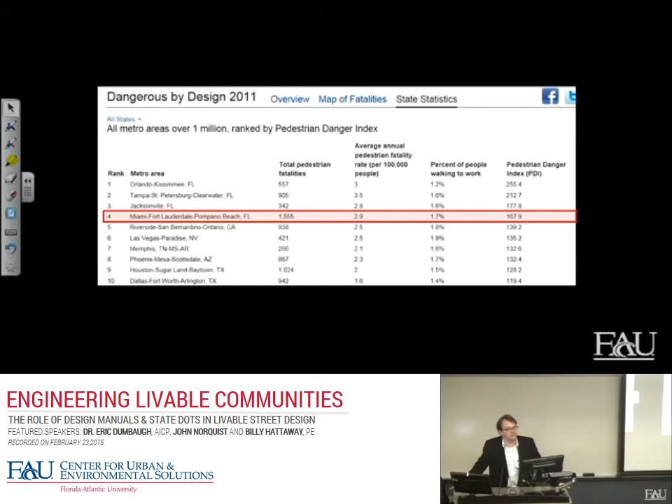So first, most of you know this, we are in Florida, there's a newer one out now, but we have some of the worst metropolitan areas for pedestrians and cyclists. The four worst areas in the country are here in Florida, with Miami-Fort Lauderdale being number 4. Though I think we might have come up to 3 in the last one, right? Yes, which was based on 2012 data. All right, number 14. Excellent. So we're getting worse. Exciting stuff.

We lead the nation in the number of senior citizens killed in traffic accidents. So not only do we kill everyone at a higher rate, but senior citizens especially, our most vulnerable people.

We also have, and I don't know Billy if you knew this, we have the most dangerous city in the United States for traffic fatalities, the city of Fort Lauderdale. If you want to get injured or killed anywhere in the United States, that's the place to be. They have 22 fatalities per 100,000 population, which, by way of comparison, is worse than Mexico. You're better off driving in Mexico than you are in Fort Lauderdale. We've got a perfect storm of tourists, drunks, unfamiliar people, the crazy yacht folks, all coming together and running into each other every day.

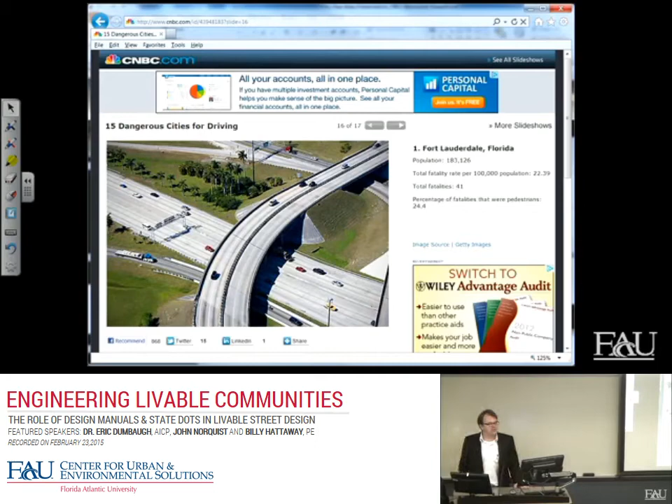And it's gotten so common down here that cities have elected to start regulating the roadside memorials for all the people that are getting injured or killed in our streets. This came out a while back, we can thank Coral Springs for it. Tired of being reminded about the deaths and injuries occurring on the roadways, they introduced land use regulations to prevent those memorial markers from being put on their roads. Because you can't maintain the fiction that you're a great place to live, work, and raise a family if your children and loved ones are getting killed on the streets. So rather than address the safety problem, we'll just go ahead and ban the signs, right? No harm, no foul if you don't see it. Out of sight, out of mind.

So how do we get this? First, let's go back to why we have the roadways we have. The issue that we have as urbanists are the issues of big roads, and how we're going to address these things.

Now, we had a very real problem with big roads at the turn of the century, but not the ones that we have today. The problem was that the majority of our roadways were dirt, right? Roadways that were prone to becoming impassable during the wet season. Those of you who have seen clay dirt roads know this. They're impassable, they become swamp during rainy seasons.

And then they're almost as bad in the summer when it's dry because all the ruts and grooves that have been put into place during the wet season then become locked into the ground. If you've ever driven or been on a clay road, you know exactly the problem here.

Now, the issue becomes when you have goods movement. You've got an agricultural society trying to get goods to market. The challenge was, how do we build a transportation system that's going to cross the country and allow people to get their goods to market with a minimum amount of delay? And there's a couple ways you could do that.

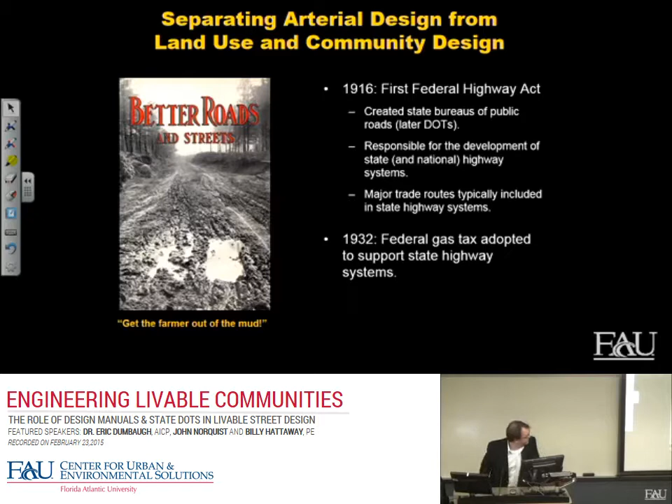And of course, everybody wants free money, right? Federal funds are free, right? They're magic money. They don't come from anywhere. You want it. So everybody adopted, that was sarcasm. Everybody adopted state highway agencies at the time.

Now we need to add a further perspective about interstates, because this, I think, is pretty important to the legacy of what's come back subsequently. Also in 1919, there was a concern about what would happen if the west coast of the United States were ever invaded. How would we get troops from Washington, D.C. to San Francisco? How long would that take?

So the U.S. Army put together a transcontinental motor convoy, which was tasked with moving a regiment of troops from Washington, D.C. to San Francisco to see how long it would take during a crisis event. Now, one of the people that was part of this, that led it, was a young, I think he was a lieutenant colonel at the time, Dwight Eisenhower. Right? He was tasked with leading this movement of troops from one side of the country to the other.

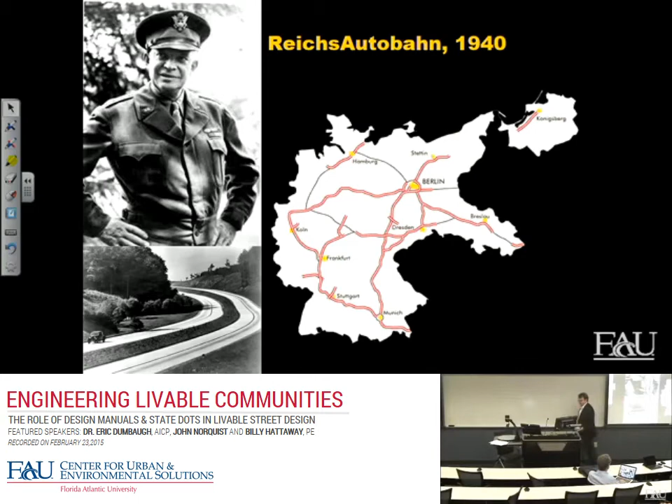Right? This was national standard by the American Association of State Highway Officials. For those of you who want to divide, how many feet is that per lane? 9 to 10, right? Can we do that today? No. Substandard, right? 9 to 10 foot lanes. That was the common. That was the basis.

This thinking changed in the 1960s, and it changed as a result of the publication of Unsafe at Any Speed. It was published by Ralph Nader, and we know it for the repeal of the Corvair, but it was actually a theoretical treatise on how we ought to be addressing safety in the United States. And what Nader was arguing is that we ought to be addressing safety on our roadways just as we do epidemiology. Epidemiology as a profession is concerned with the elimination of the environmental sources of hazard and injury. And it's based on the premise that we often can't assume that people will protect their own health and safety.

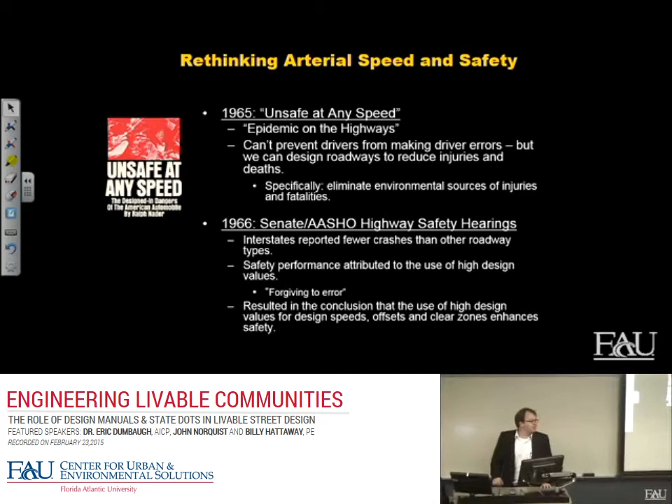Right, this carried forward some testimony at the time so you can get a sense. I'm not making this up. This is actual testimony that became the basis of U.S. design policy. Kenneth Stonex, who, if you get the Lifetime Achievement Award for Safety from the National Academy of the Sciences, it's named after this guy.

Now, what was his perspective on safety? What we ought to do is we ought to operate the 90% or more of our surface streets just as we do our freeways. We ought to convert our surface streets to freeway road and roadside conditions. Widen the lanes. Widen the clear zones. Add the shoulder. Make it as wide as you possibly can. Take the interstate standard and put it on our urban street.

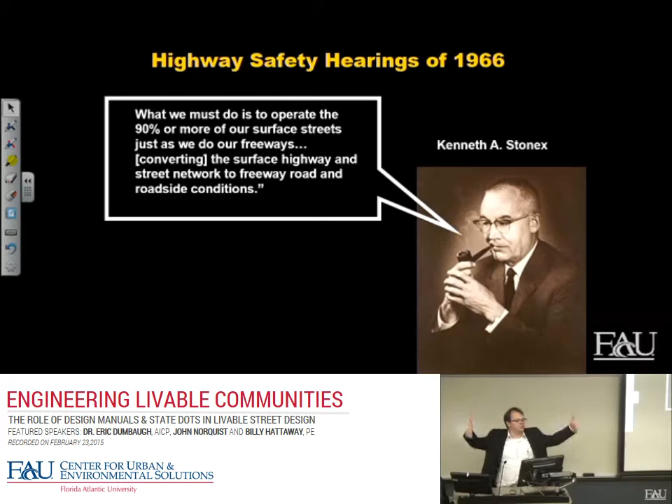The first is we ought to take the most ridiculous driving scenario we can imagine and use it as the basis for design. So when I did my PhD in engineering, I learned the concept of the design driver. Do you have any engineers in here who know that concept? What's the design driver? Now, I was trained that the person we should be designing for is a little old lady on an unfamiliar roadway at night in the rain while drunk. And if we can design it for her, it should be safe for everyone, right? This isn't a real person. It's an imaginary set of conditions.

Although if we were being serious about actual risk, it would be a teenage boy in the car with his friends at night while drunk. Those are the ones that crash. And texting. And texting, right? We can add that now. So let's not worry about real things. Let's worry about imaginary worst-case scenarios.

And then secondly, this is the best, that we don't even have to know why these crashes occur. Let's ignore the causal chain, right? If we assume this worst case scenario, we can solve the safety problem even while completely ignorant of the precipitating causes, right? And ignorance is knowledge. That's what he's saying. And this idea gets carried forward.

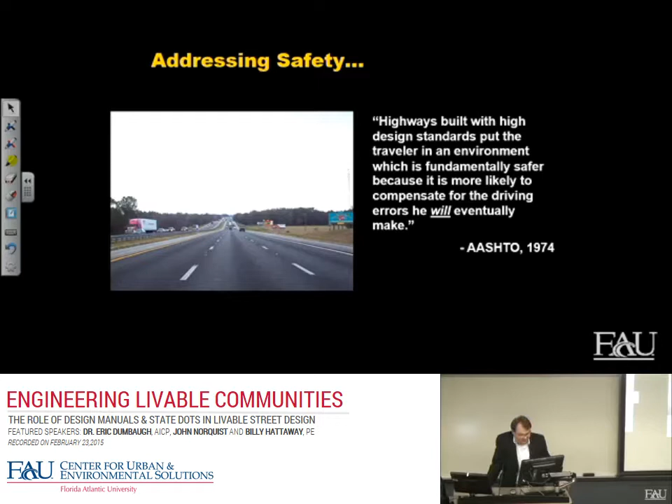That's why we can have as goal one in any transportation plan the creation of a safe and efficient transportation system without paying any attention to safety whatsoever. By virtue of making it efficient, we can assume that we have therefore made it safe. All right? This carries forward through subsequent editions. We have two more after this one, but you still see it in there. Every effort should be made to use as high design speed as practical to attain a desired degree of safety.

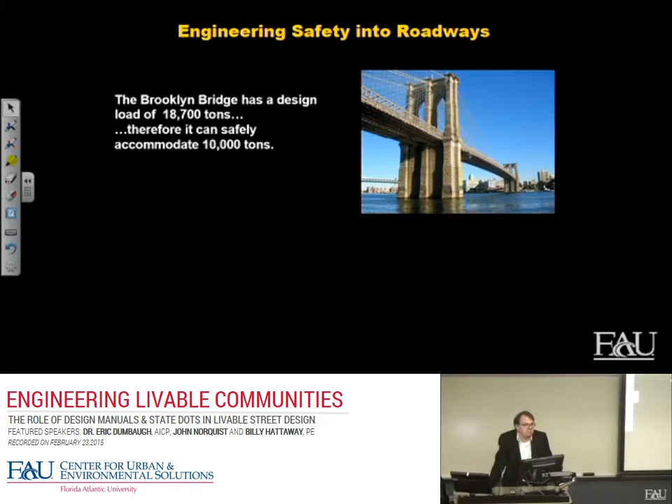Right? And from an engineering standpoint, this makes great sense. Right? This is exactly how we're trained. So if the Brooklyn Bridge has a design load of 18,700 tons, it logically follows that it can accommodate a load of 10,000 tons. Right? That's about half. That makes sense. Likewise, if we design a street to be safe for people traveling at 60 miles per hour, it should therefore also be safe for people traveling at 30. Right? Does that follow?

There's some disagreement here. All right, another thing, this will highlight the problem here in a second.

So we also have this thing called the 85th percentile speed. This is, we go out, we observe drivers, and we try to understand what should be the appropriate speed limit for a street. This is from the Texas Design Manual.

Could be anywhere, the same concept applies. What we want to do is go out and get a distribution of all the speeds we observe on a roadway. And what we find is that roughly 85 percent of people fall within a certain band, and there's a curve of drivers going significantly faster than that. We say these people are being unreasonable, we can address their safety, but most people fall in this band.

So if we pick the 85th percentile number, we should be able to design a roadway that's safe for most of its users. Now the rationale here: the majority of drivers are reasonable and prudent. They don't want to have a crash, and they desire to reach their destination in the shortest time possible. Because of those three things, the 85th percentile speed should be considered the maximum safe speed for the roadway. We'll observe how fast people feel comfortable driving, and then we'll design for that.

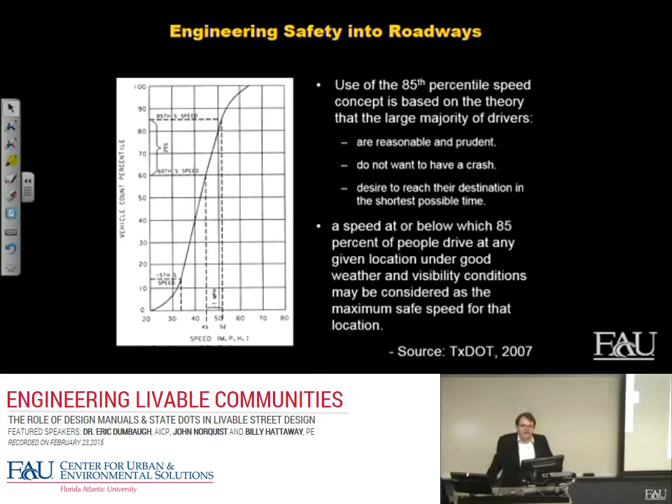All right, let's take this and apply it to another health concept. Let's apply it to obesity in the United States. Same premise here: the majority of people in the United States are reasonable and prudent. They don't want to suffer from obesity, heart disease, or diabetes, and they're going to eat the food they enjoy.

Therefore, a safe BMI is that which is equal to the 85th percentile BMI of the population as a whole. Now, the 85th percentile BMI of the population is like 33, which is morbidly obese. So what we've essentially done with this logic is wiped away the obesity epidemic in the United States. All gone. I don't ever have to go to the gym again, because most people are reasonable and prudent.

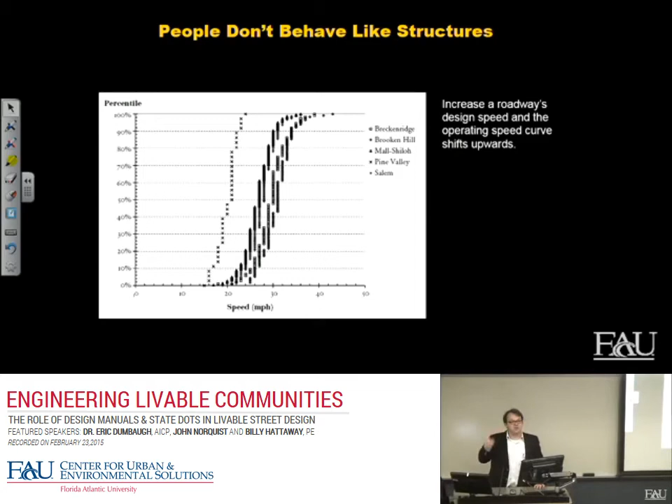We widen these things out, widen the lanes, and more importantly, widen the distance between buildings. We're not making the roadways safer or less safe necessarily. The one thing we're always doing is making people drive faster. The wider it is, this shows a straight linear function: the wider the lane width, the wider the street width, the faster people are going to go. That is an absolute truth. Widen it and they will go faster.

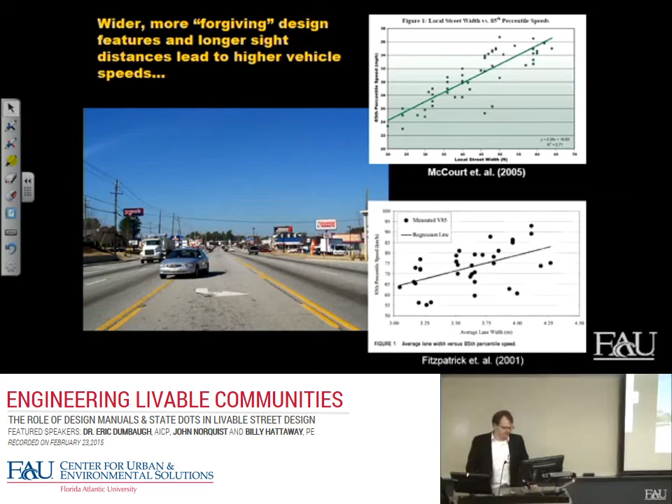Now, in some places this isn't a problem. It's not a problem on the turnpike out by Okahumpka. There's nothing out there, you're just driving, there's no impedance, it's fine. Where the problem comes is when you apply it to an urban environment, because there are all kinds of obstructions: pedestrians trying to cross the street, cars not knowing where they're going, stopping, taking time to turn. There's all kinds of things going on in the street, and the faster you are, the less likely you're able to respond appropriately.

So let's look at stopping sight distances for different speeds. This is the amount of time it takes for a vehicle to stop from when the driver first observes a hazard to when they're able to bring the vehicle to a complete stop. At 20 miles per hour, superimposed over Portland, these are 200-foot blocks for perspective, and this right-of-way is about 50 feet from building to building. At 20 miles an hour, a 100-foot stop: somebody crosses mid-block, a person entering that block can stop. Crash avoided.

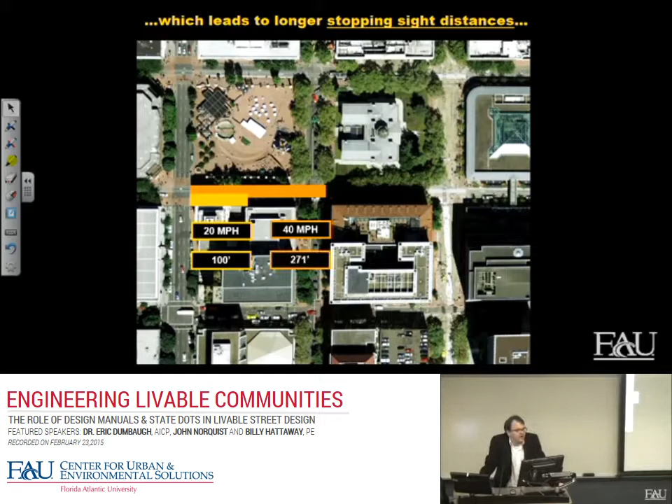Let's go up to 40 — going all the way through the first block and into the intersection. Anybody crossing in this environment is going to be struck. The car simply physically can't stop.

And if we go up to 60, we're going all the way through the first block, all the way through the first intersection, and then all the way into the second block as well. Right? That's the safety problem, right? When there are all these conflicts here in which vehicles can hit.

And we widen things out, we make them go faster, we make people less likely to be able to avoid those things. And the problem can be kids darting out into the roadway. Kids do this, right? We can blame the pedestrian and say they shouldn't have done it.

And maybe they shouldn't have, but they're going to do it, right? And pretending boys, right, pretending that a 13-year-old boy isn't going to do that, you can wish in one hand and do what in the other, right? Like, that's just what kids do, right? The same thing with drivers. You can put that no left turn, no crossing sign here. People are going to do that, right? These things are just part of the urban environment. People need to get from one side of the road to the other.

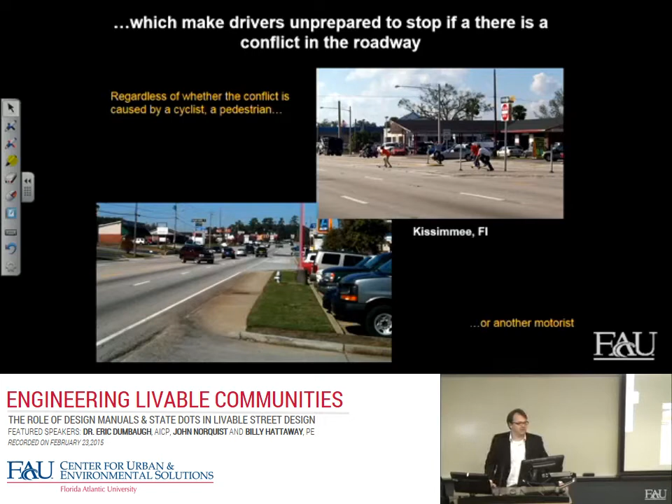And we've created a condition where they're going to get struck when they do it. We've gotten the gun, we've loaded the chamber, and then we've handed it to people. And it's them behaving as they would naturally behave that constitutes the pulling of the trigger. Everything is set up. It just takes somebody to precipitate that chain of events to cause the injury or death to happen. All right? Now, sometimes we like to play this shenanigan.

What's going on here? This is Hampton, Georgia. Anybody, what's wrong with this picture? No. Speed doesn't match the design section. Not at all. Not at all. Who is this good for?

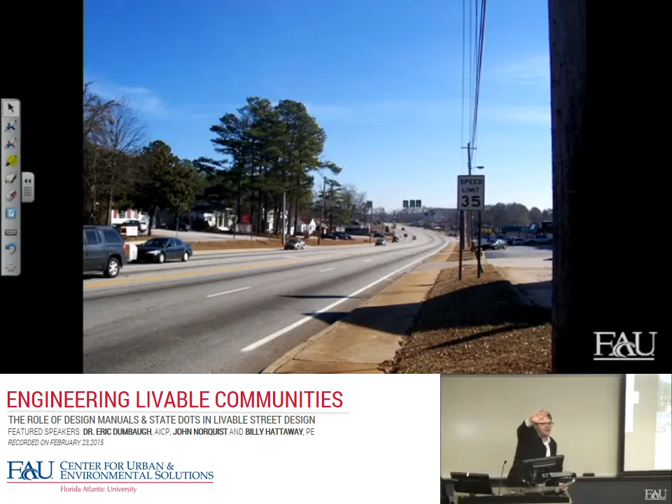Police. Police love it, right? If you want to make money, generate revenue for your locality, you set up a cop with a radar gun right there. The road says go 60 miles an hour. Tear it up. We'll even put a little curvature in that roadway for you too, right? So you can bank it like at NASCAR, right? Just tear it up. And then we'll cite you and you'll learn your lesson.

All right? I'm going to skip some of the stats, except to say this.

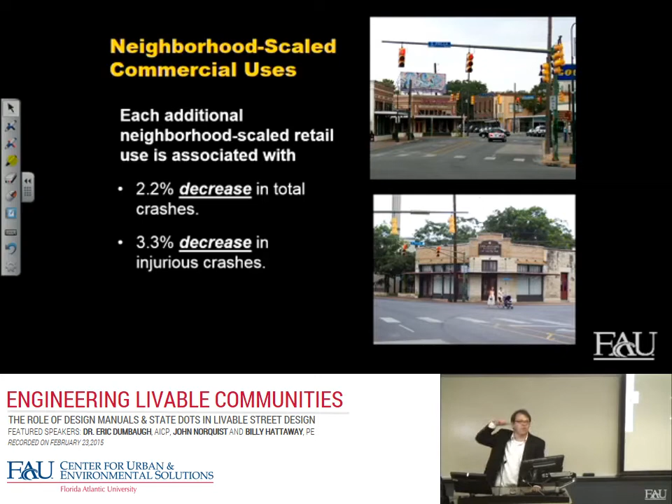In urban environments, when we start bringing these things back up to the street, what we see is that things are actually safer. I mean, right now our land use policy tries to push everything as far back from the roadway as possible. But when we start bringing these things back in, we see statistically significant reductions in crashes, not just for pedestrians and cyclists, but for everyone. Motorists, pedestrians, and cyclists alike.

In Livable Streets, part of my dissertation work looked at the safety benefits of these things compared to conventional arterial design. Significantly fewer crashes, right? Overall, we looked at mid-blocks, 40% fewer mid-block crashes, and 100% fewer fatalities. The fatalities didn't happen. I couldn't even model statistically fatal crashes for the livable section because I didn't have any observations, right? It's a crappy problem for a researcher, but it's a wonderful problem for safety.

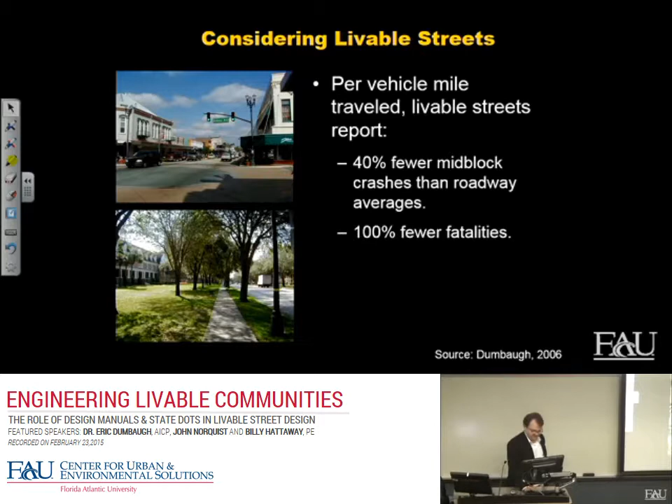Right? Wouldn't it be great if I didn't have to worry about this anymore? No, actually, I'd be out of work. So go out and get killed so I can record that, right?

Right? And an interesting thing happens when you slow things down even more. Right? Where, as a species, we're encoded to pay attention to the interactions of other people. We're designed to function pretty well up to about 10 or 15 miles an hour. We tend to survive impacts pretty well at that level. You guys have probably all seen this, the graphic that shows you the rate of speed versus your likelihood of survival. 20 miles per hour or less, your likelihood of surviving is pretty good.

Another interesting thing is true, too, that we, the naked ape, as Desmond Morris calls us, we pay attention to visual features on other people. But we can only do that up to about 10 miles an hour. When we're moving faster than that, we can no longer perceive the visual cues that we're getting from other people, so we stop interacting with them like people. Right? We start going into the car sphere, and you guys know this too.

In fact, a friend of mine related this problem the other day. She was taking her son back from karate practice.

They're driving, and there's an idiot in front of her that just won't pull out of the stop sign, and she's getting frustrated. She hits her horn a few times. Her son is like, 'Oh my God, don't you know that's Kasim's mom?' And she felt horrible, right? Because she was dealing with the impersonalized abstraction of an automobile, not realizing it was actually part of her social network that was in there. So suddenly the entire norms changed. She thought, I shouldn't have done that.

The same is true when you're in a car generally. It's the idiot in the Impala, it's the idiot in the Charger, it's not a human being. But at 10 miles per hour or less, you start to see the visual features of these people. You can see what their faces are communicating, and you slow down.

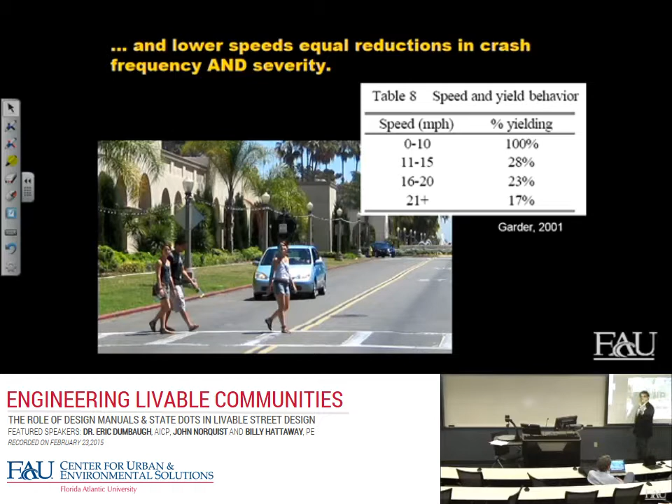This is one of those things you do when you're a teenager. One of the experiments I did was seeing which buggies people were least likely to affect. You have the two carts: the regular shopping cart and the baby cart. So, again, you're a teenager, you're bored, so we would push the carts right in front of people's cars to see how they would respond. The shopping carts, they would actually just back out and push it away, but the baby carts were sacred, even though there were no babies in them. The idea that a baby might be associated with it made it a little extra special. Nobody likes dead kids.

Hopefully. I'll skip all this. I don't think we need much of this. Yeah, that's what I want to say.

What I want to do is talk about that to segue into these presentations with that context, which is: we've tried to superimpose the highway environment on the urban environment, and this has created a whole host of problems. It's totally negatively impacted the value of a lot of our cities, which John has become expert in, and it's created a lot of fuel for folks like Billy to solve all the problems we've created. We're going to put the pressure on him to do that.

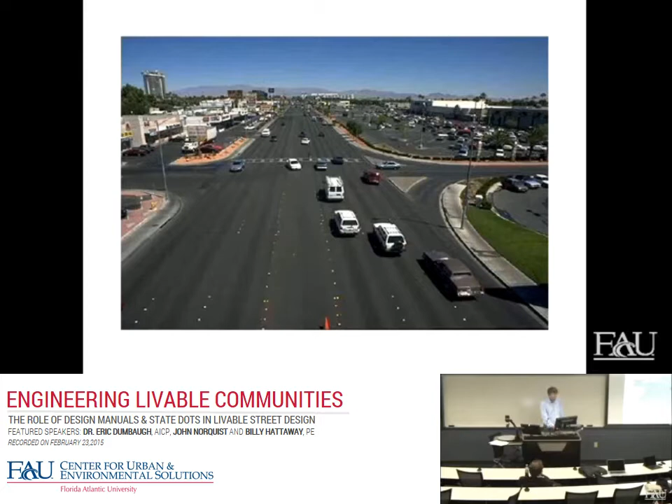But it's dangerous to cross streets. You all know that if you try to cross Glades or many of the other streets in Boca Raton. And the biggest streets tend not to have much going on, particularly in terms of pedestrian activity.

But this desire to have the streets move traffic quickly, you have to understand, when the new technology of the automobile came along, it must have been a tremendous thrill to all of a sudden be able to drive fast. And so the idea of a grade separation in a city must have been very attractive. Not having to slow down, not having to go through frustrating traffic, but just be able to whip right through the city.

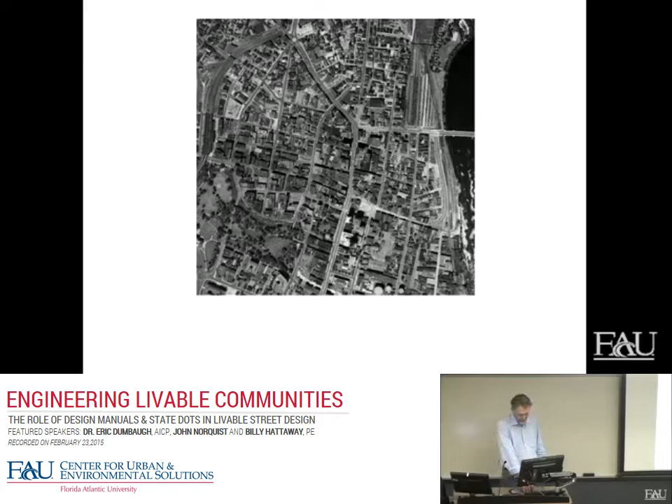And so the idea of re-engineering the cities to accommodate this traffic relief led to the re-engineering of cities. This is Hartford, Connecticut, an aerial shot right after World War II. And this is the way it looked 40 years later. You can see where the freeways have gone. I'll put it back so you can see the previous shot again.

An even more striking example is St. Louis, which was in the 1950 census the eighth largest city in America. It had 900,000 people. Today it has 327,000 people, almost two-thirds less.

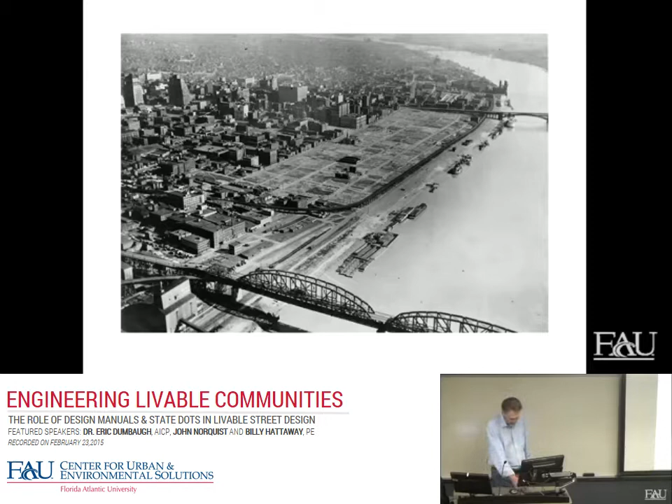Today, with the resurgence of attraction to urban life, it would be a very, very valuable place. Here's a view of how it looked with the Eads Bridge in the background.

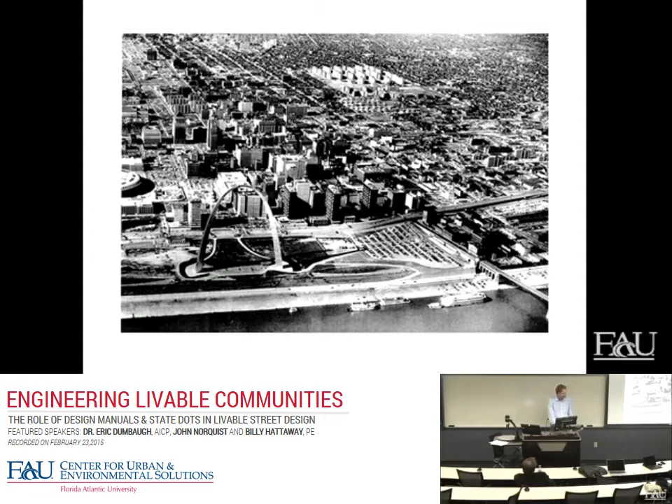And here it is with the arch, which was placed in there. I've been in the arch. It's a tourist attraction, but it pays no taxes, and there's no census tract of population. So one of the reasons St. Louis declined was that. Another is that they built freeways to the point where the Famous-Barr department store is closed, so there's no department stores in downtown St. Louis, even though it was the 11th largest city in America at the end of World War II.

Now it's not just big cities that are affected by this desire to defeat traffic congestion, to fight traffic congestion, the war on traffic congestion, sort of like the war on drugs. The war on traffic congestion led to casualties, and the casualties, of course, were the cities where the remedies were applied.

Now, we usually blame it on Billy or Eric or anybody who's an engineer. It's their fault, but it's really not the engineer's fault. Every beautiful place that you love, if you like South Beach or Greenwich Village in New York, or the old neighborhood in Boca Raton, anything you like, you have to realize engineers were involved in designing those things. So the commissioner's grid in New York City, engineers did that. So it's not about that, but it's about a lot of things. But one of them was the design sensibility of the modernists.

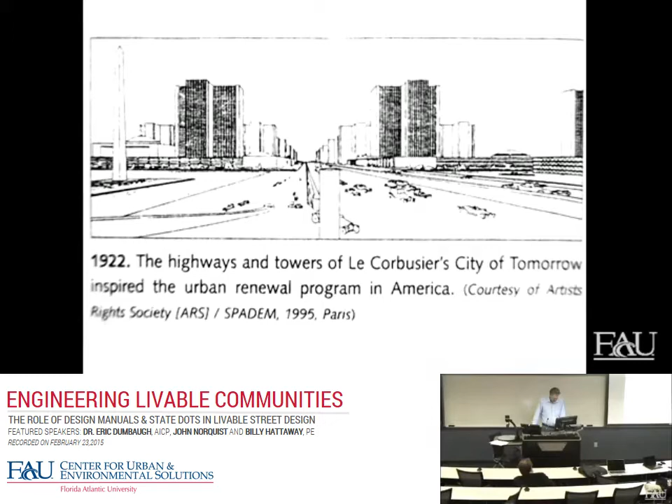And so one of the things that was new was the motor car and the idea that you could drive through a community without having to stop, that you could just whiz right through. This is Corbusier's drawing in 1922, with the steel reinforced buildings. And this is a drawing of what he wanted to do on the right bank of the Seine and the Jewish quarter: replace all those buildings with his design, with just tall buildings and all streets grade separated. Now that wasn't done in Paris. They resisted it, so it never happened. If you go back to Paris, the Jewish quarter is still there, and it's worth billions of dollars, billions of euros in real estate value.

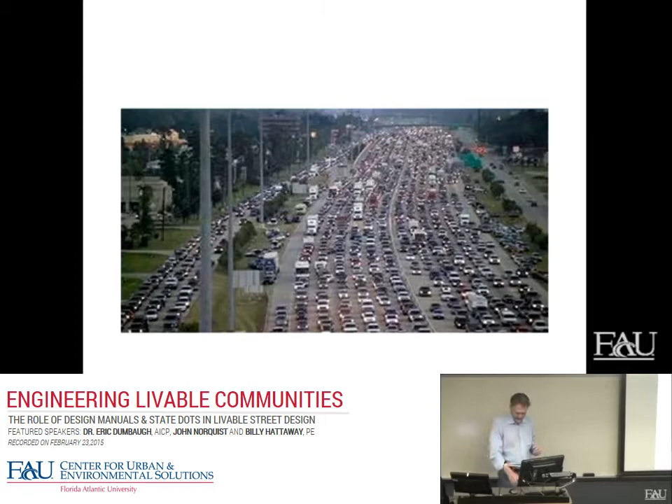And this is one of the bigger freeways in Houston. This is an unusual picture because they're all going the same direction because they're evacuating Rita. And one of the purposes of the freeway, the National Defense Highway, was an evacuation route from the cities. So that if the Soviet Union would launch and the missiles would come from Kamchatka and Siberia over the Arctic Circle and land on major cities like Houston, in the 41 minutes or whatever that you had from the warning, you would be able to hop in your vehicle, get on the freeway and head out, and then look back and see the mushroom cloud, but you wouldn't be dead.

But that's not how it worked, because you could see it with Rita. When Hurricane Rita was coming, the freeways were inundated. A lot of the street grid that Houston ever had had been eliminated, and so people weren't able to get out of town very fast. Anyway, I don't want to focus just on freeways.

The other streets all have characteristics that fit on a gradient, from the alley to the large expressway. And these issues have been visited on all of them, to the point where, for the standard arterial street in the U.S., if you wanted to do the right thing, you'd follow AASHTO. It's not really a guide. It's a guideline. They say there's flexibility. You don't really need to do it. But if you want to do it right, you do a 70-foot arterial with a 20-foot double left turn lane, and then a big clear zone on each side. What do you think, 100 feet, 30 feet? At least 30, 100 if you can get it. And that way it would be safe.

And then you end up with pedestrians, there's no money left for sidewalks, so they gradually form a dirt path, or you can walk in the gutter. But on the big ones, on the expressways, you wouldn't even be able to do that. All right, so we came along with this Designing Walkable Urban Thoroughfares. Billy helped with that, along with many other traffic planners and engineers and professionals. And the basic idea was to create an alternative for urban context.

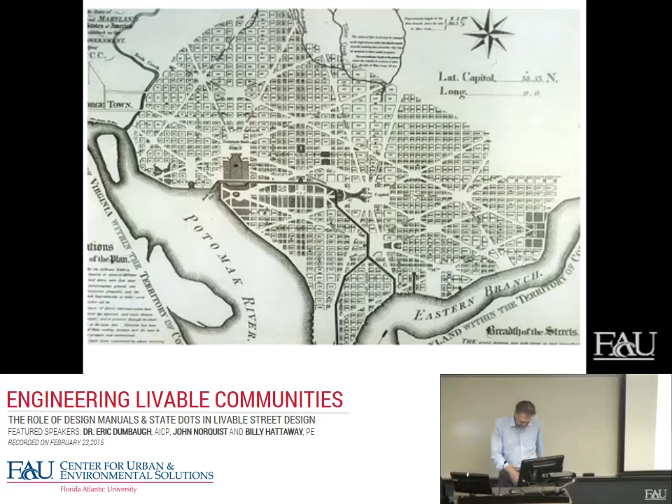The traffic engineers tried to have time-of-day no parking, and the merchants wouldn't have it. And the merchants have a lot of power. Because of the corrupt Chicago political machine, the property owners and the retail people merely have to show up at the alderman's fundraiser to block any crazy ideas. So it isn't because of some idealistic environmentalist or reform traffic person. It's because the merchants didn't want it, and the merchants have more clout, and so they won.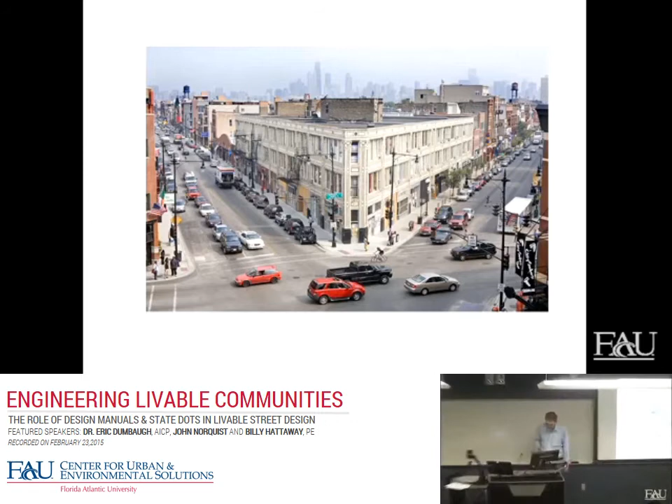And so did the neighborhood, because it is congested, but it's congested with people with money in their pockets. It's congested with all kinds of jobs. It's one of the most prosperous neighborhoods in the Midwest. And the same with Dundas Street in Toronto, which has one moving lane in each direction, which includes the streetcar. It runs right through Chinatown slowly, but it's crowded. People still get on the streetcar even though it moves slowly. They like being there. So that's one of the things about congestion.

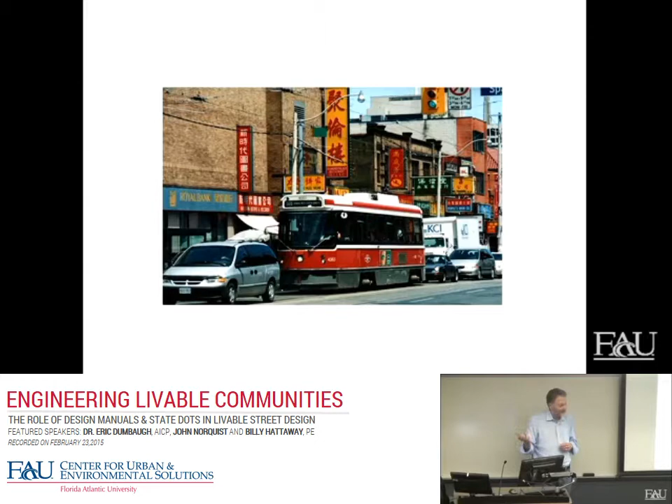When you see congestion in a very urban setting, it's usually because people want to be there. If they didn't want to be there, it wouldn't be congested. Or as Yogi Berra put it, he argued the other way. He said, people don't go to New York City anymore, it's too crowded. So, it's kind of counterintuitive.

So, when I was mayor, I didn't give much of a damn about the suburbs one way or the other. I'd pretend to get along with them. I'd go to the council mayor's meeting or something and meet with the mayor of Brookfield and say, Merry Christmas or whatever. But when I became head of CNU, all of a sudden my jurisdiction wasn't just the city. I had to think of the suburbs.

And so Elgin, Illinois, just outside of Chicago, is an old city. It was a place where they manufactured artillery for the Union Army during the Civil War. And they had a lot of steel and foundries and things. Anyway, it's a big city. They annexed a lot of land, which was still mostly farmland.

And the DOT wanted to turn Highway 20, which is this street, into a freeway, grade separated. And they said, well, that'll divide one part of the town from another, and we won't be able to develop it, and we'd like to have business. Here's a business here. They wanted to cut all this stuff off. And so the mayor asked us to help them.

Highway 20, by the way, in Chicago turns into Lake Street. So if you've ever been to the Loop, that's the street on the north side of the Loop with the L going over the top of it. It's not even 50 feet wide. In Chicago, you talk about a lot of congestion. I mean, there it is, 50 feet wide. And they wanted to turn this into a freeway in little old Elgin.

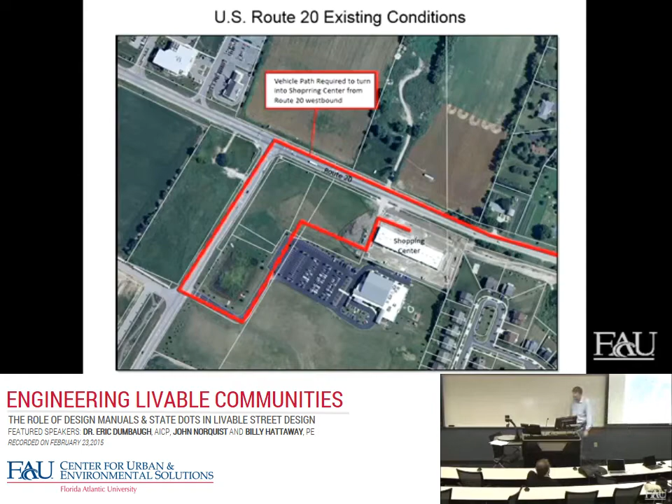So we said, well, right now, to get to the shopping center, you have to go way over here and come back here. So why don't we improve it? Why don't we make it better for the merchants and still allow you to have fast traffic and put in streets that would cross, not all of them.

And anyway, what we proposed, and I guess I don't have that slide here, I have it later in a different context, was to have slip lanes on each side and then have crossings every 3 blocks or so, and then you could access the retail and still have 4 fast lanes in the middle. And that's still being debated, and the DOT doesn't have enough money to build the freeway, so maybe we'll end up winning on that one.

So anyway, the DOTs are changing, and this is what Billy in his job had to deal with when he was first being trained. But the local roads are not important to DOTs, it's the freeway and the arterial, and that's sort of the logic to it because they're big, the state. So if you take a state like Texas, why worry about Austin's street grid? That's their problem. What they worry about is big stuff, like going from Dallas to Houston, or El Paso to Beaumont.

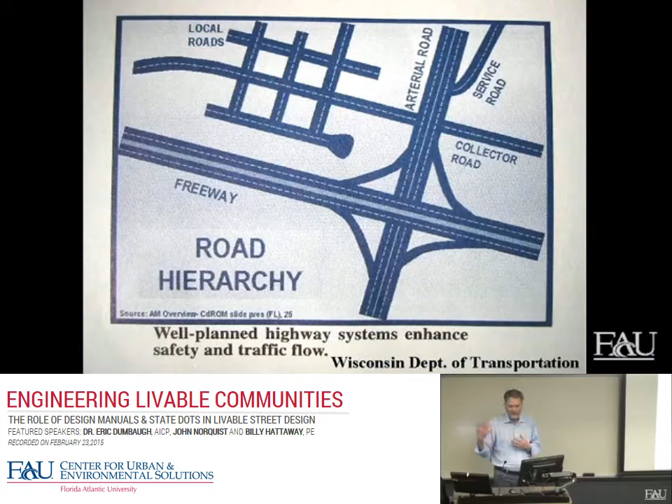So it's natural they think that way, but if you think of it in terms of a city, what adds the most value to the city? And what helps that city distribute its traffic? And so, this has been a struggle, and it's where you look at it from. If you're a local official, you're looking at it differently than if you're a state official. And that's a big part of the problem.

So, what is a city? If you look at Leon Krier's drawing about separation of uses, highly use-separated zoning, you'd have the civic center by itself, the city hall, the parking lot, the fire department, whatever, all of it named center. Anything named center is usually ugly, if you look at modern context. And then the private property separated. But if you put them all together, you get a city. And that's the way to start thinking about cities.

And if we can get DOTs to understand that once they're in this complexity, their job is to try to help add value to the civitas. And you can definitely see it with the street grid. I showed this slide once to some road builders. Look at all the roads. Look at all the road contracts with a street grid. The commissioners' plan from 1811.

Let's talk about making money off roads. We're not trying to cost them their living. We're just saying you don't have to have everything on one road.

Look at the real estate value in New York. They're tearing freeways down, starting with the one on the west side many years ago, and look at the real estate values, and look at what people are doing.

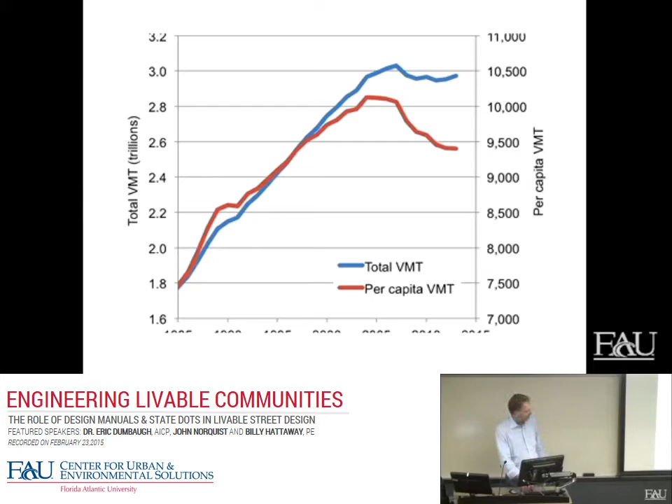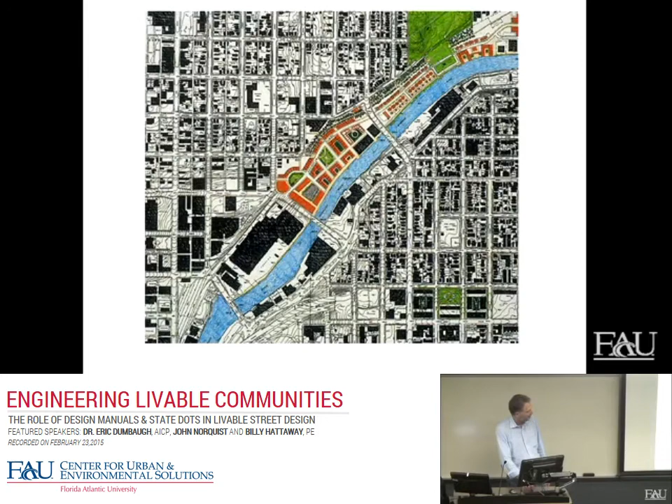All right, so I wanted to finally, toward the end here, make the analogy to water. The water engineers have already made the transition — they understand that draining wetlands is not usually a very good idea.

After years of thinking their job was to get rid of the wastelands they thought were swamps, they've learned not to destroy these places — they slow down water congestion, absorb water, and serve as habitat for valuable plants and animals.

Real estate developers like developing on the outer edge, beyond where the water is, because it works as real estate as well. The mosquitoes are eaten by bats and birds and so forth. So even that has worked.

So this kind of stuff isn't done anymore too often. There may still be a few being done in Florida someplace, but only out of complete avarice and ignorance.

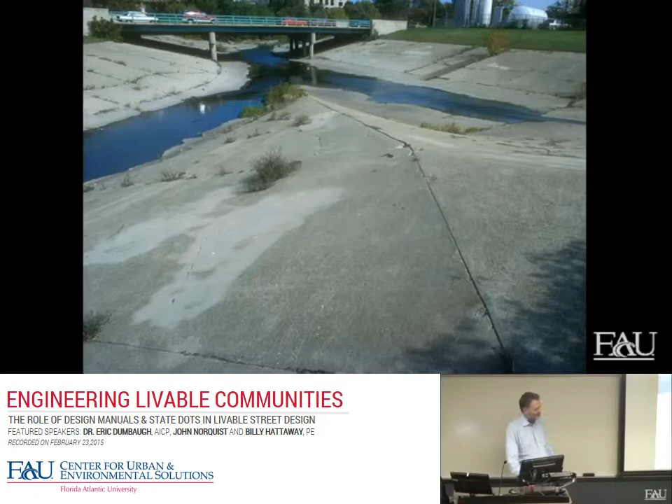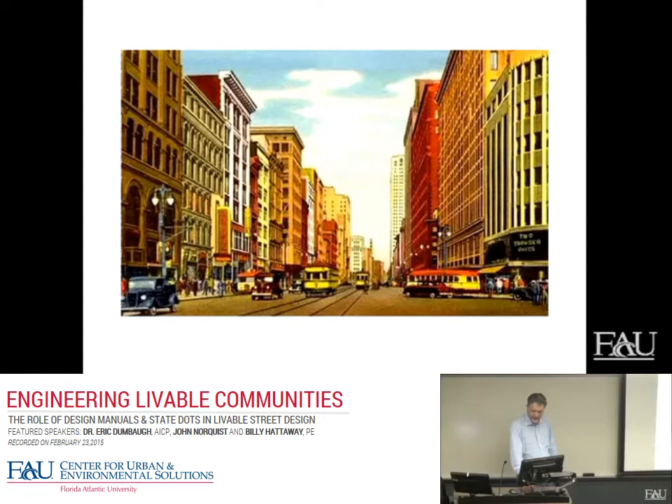Or Detroit, the most supreme example of destruction of a city — the most successful city in World War II, where more war material was produced for the Russians, for ourselves, and for the British than any other city on earth. At the end of the war, it was so successful it was congested, so they decided to do something about it — they started building expressways.

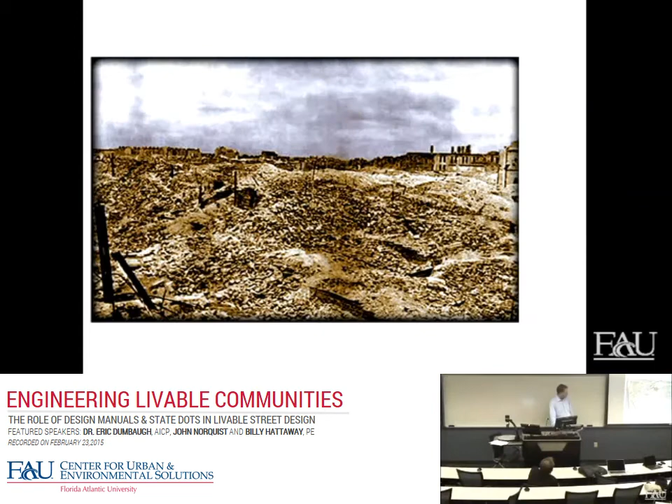This is Warsaw in 1945. Here's Warsaw today — this was actually fixed in 1953, the Old Town.

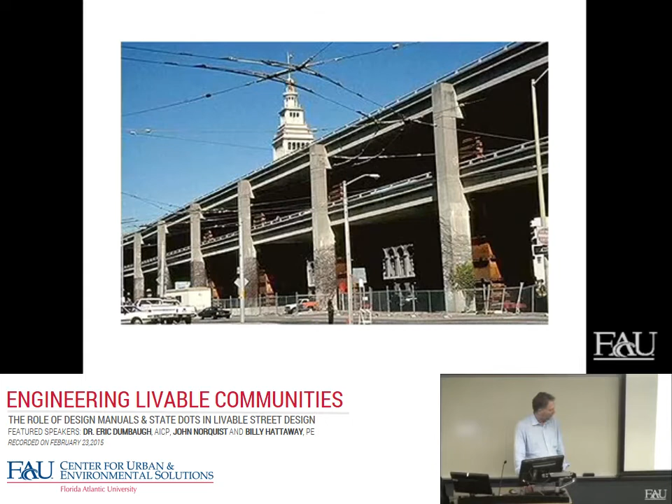This is a ground level picture. In San Francisco, one of the most beautiful cities on earth, they built a double-deck freeway. It's now gone, and the property values have skyrocketed.

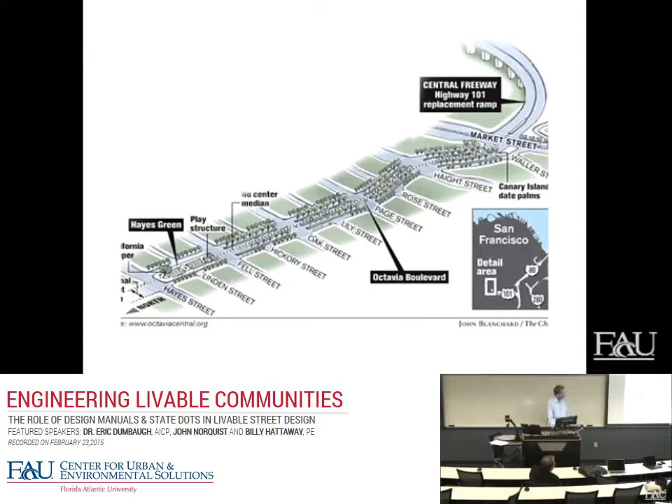They even put in some affordable housing, which in San Francisco would be more expensive than housing in a lot of other places. It's all relative. They also tore down the Central Freeway, part of the freeway, and put in a boulevard instead, and it works just fine. There's the cross section for it.

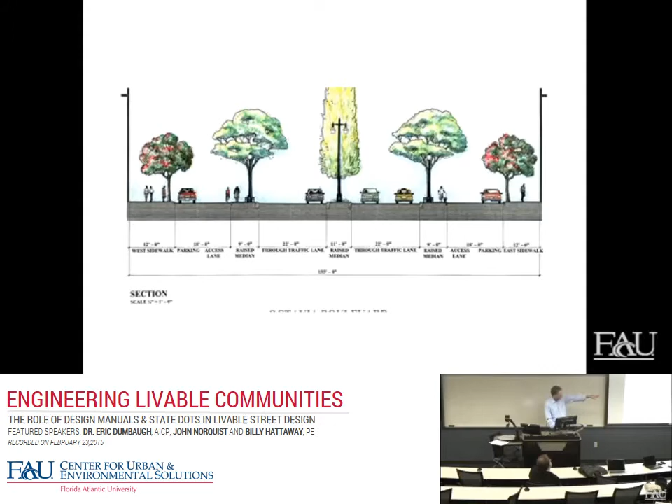And then the most dramatic of it all is in Seoul, South Korea, a freeway that went over the Cheonggyecheon River, a double-deck freeway paid for in part by American taxpayers after the Korean War. It was ripped out and the river restored. Now it's the second biggest tourist attraction in South Korea. In fact, it's the second biggest tourist attraction in all of Korea, because there are no tourist attractions in North Korea, or at least no tourists.

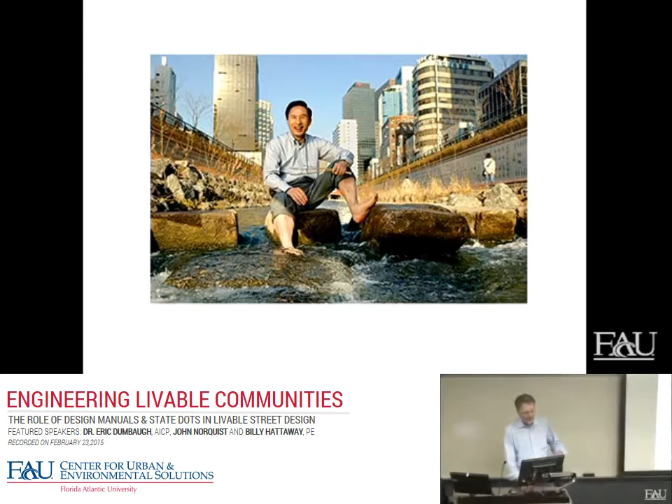This is the guy who did it, Mayor Lee Myung-bak. In 2001 he was elected. By 2003 he had removed the freeway, and look how happy he is. They've now torn down 15 more sections of grade separation in Seoul. They're going to eventually eliminate all of it, and they've added more transit, and the city just gets stronger all the time.

Now, just so you know, you don't need to be some kind of weird socialist country somewhere else in the world to do this stuff. In Salt Lake City, they have the fastest growing rail system in the country, with light rail and a commuter train that has 28 round trips a day between Ogden and Provo, stopping in Salt Lake.

It's not all about engineering of roads. You've got parking regulations. This building site was empty for 30 years because of a parking regulation requiring 7 off-street parking spots on a 19-foot frontage building. We eliminated the parking regulation, and right away the building was rebuilt.

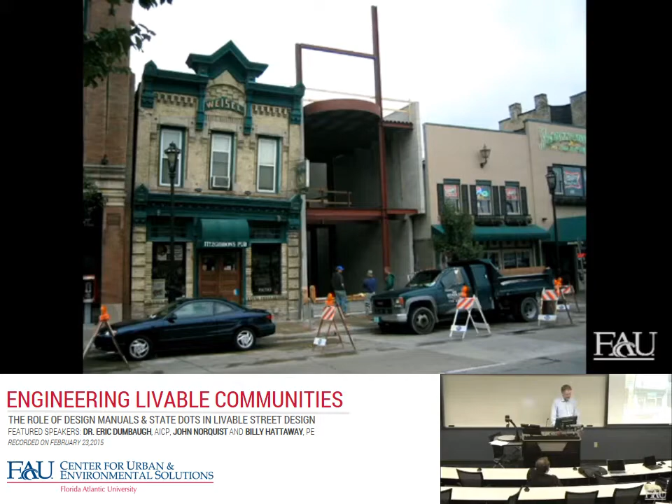Then you get these mega parking lots all over the country, like bowling alleys, with a zoning ordinance spread nationwide requiring 5 spots per lane for bowling alleys. Some planner thought that was appropriate, but there are only 4 bowlers per bowling lane. So this spread everywhere and led to non-performing real estate. The bowling centers built everywhere failed as real estate because they didn't need that much parking, and they really needed to be located with other businesses.

Good evening, there's something strange happening here. There's a whole lot of people on this side and nobody over there. Did one of you guys make the rest of these folks upset or something?

No, it's great to be here, and it's certainly great to be here with John and Eric. We go back a little ways. I'll give you the short version of my career. This, as I described to my employees, is my third and final tour with Florida DOT.

During my second tour, which went from 1987 to 2002, I ended up coming from Texas through DeLand, Florida, which is where the 5th District is based—we have 7 geographic districts. The 5th District includes Orlando, Daytona Beach, and the Space Coast. I went through that district to become the state roadway design engineer. I was recruited by our chief engineer to take that position in '95. Shortly after, a friend of mine who was the first state bicycle pedestrian coordinator in the country with a DOT was Dan Burden, and Dan and I got to be good friends.

Within a year of me coming, the state roadway design engineer took me out west, where we did a tour starting at like 6 in the morning and finishing up at 10 or 11 o'clock at night, from Portland down to Long Beach, California and back, meeting with planners and engineers from all these communities that were doing a lot of stuff right.

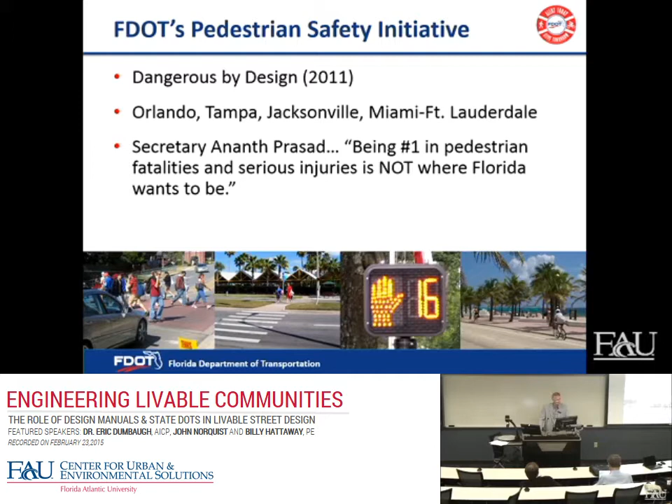And so we set about changing that direction. This is the statistics related just to pedestrians. You can see that it has a pretty devastating effect, because obviously we all know each of these people are connected to someone. They're a family member, they're a friend.

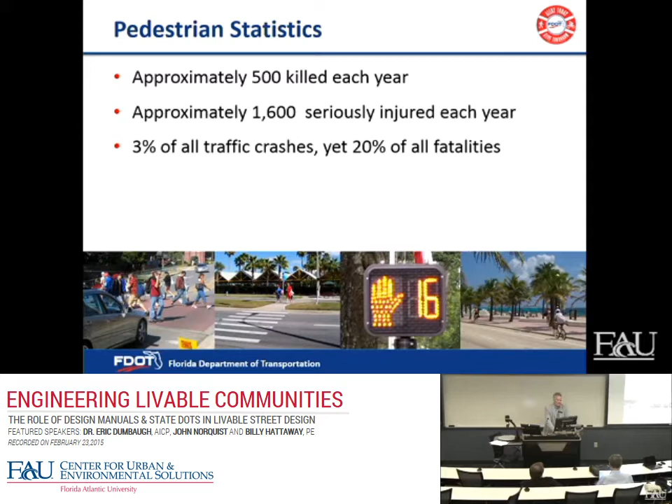And yet we have consistently about 500 people dying a year on our roads. When we first started the campaign, the secretary said, we're not going to stop with these 4 regions that are the most dangerous. We're going to focus on our top 10.

But as we've worked over the past couple of years, we decided that the difference in data from the top 10 and the top 15 wasn't different. So we've now added 5 more counties. So almost 20% of our counties are part of our focused initiative.

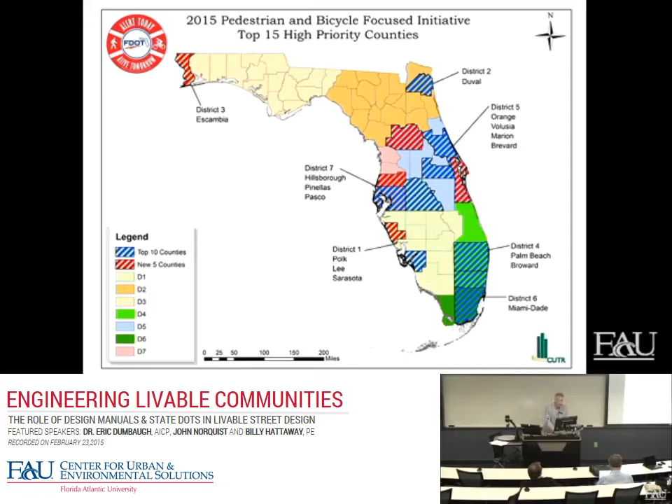It doesn't mean that we're not doing things in other counties, but our focused initiative is initially on these counties because we've got a very concentrated effort moving forward as a result of that.

So the things that we have put in place as a result of my leadership and having the secretary completely behind me: we're developing our first bike and pedestrian element for our state long-range transportation plan, which we're in the process of developing. That will lead us to a statewide bike and pedestrian plan, which we do not have today, to identify where there are gaps in our system, both for bikes and for peds, and to get those things fixed.

We adopted our first complete streets policy in September—the first one we've ever had. And Smart Growth America, the very group that publishes the Dangerous by Design report, is free of charge working with us to implement our complete streets policy throughout all of our documents as an agency.

In fact, we had our kickoff meeting a week ago today, and we'll be working on our implementation plan with them through face-to-face meetings through June. We expect to have a draft work plan from them that basically says these are the things you need to fix from a policy and planning standpoint, and this is the education you need to do. We're involving others in this outside the organization, including CNU.

So I would expect, within 2 years, our complete streets policy completely deployed throughout the organization. That's my goal, at least.

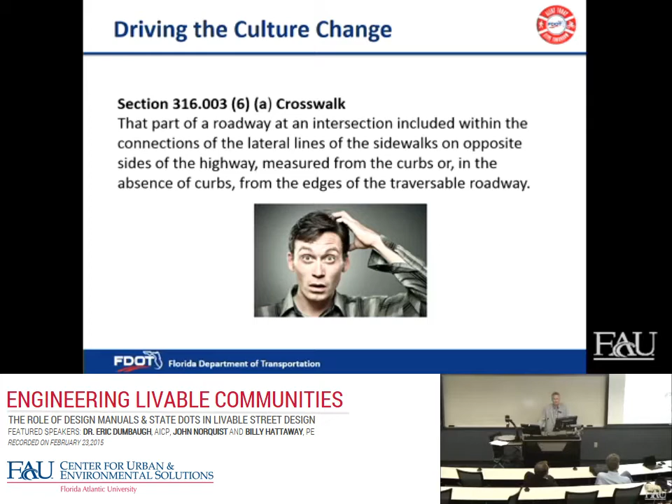So this year and next year, we're in the process of rewriting the laws. We have a group of coalition members, which I'll talk about again, but basically it's made up of our agency and a whole bunch of other stakeholders, including Highway Safety and Motor Vehicles, the Florida Association of Police Chiefs, the Florida Association of Sheriffs, and a traffic judge who's worked with us on our motorcycle safety campaign, and he's helping us with this as well.

So we're vetting these definitions with law enforcement and with the judge to make sure that what we propose can be enforced and makes sense. But obviously it will help us to educate the public.

One of the things that surprisingly came up as I was talking with our leadership about the laws: one of our district secretaries, who spent his whole career in the department, didn't realize that a legal crosswalk can be unmarked. In other words, at an intersection between two streets, or a T intersection, by law a pedestrian can cross there whether it's marked or not, and he didn't realize that. So I suspect a lot of people in law enforcement and the press say pedestrians are jaywalking when in fact they probably aren't, which is a whole other issue. Consequently, we probably have a lot of flawed data.

So how are we supporting that culture change? We're doing training and all of these things you see in the first four bullets. This training has been provided to us by Federal Highway, again for free, because we're one of the focus states for pedestrian and bike safety. We'll also have training in implementing our Complete Streets policy once we get that implementation plan.

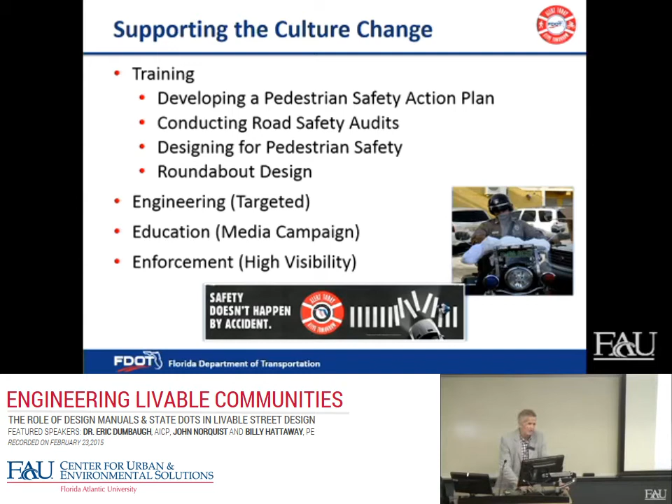But also what we know is we can't get there with just engineering. We've got to do education and enforcement. So we hand out information to drivers, pedestrians and bicyclists, helping them understand what things need to be done. We're using law enforcement first to hand out warnings when people are misbehaving. And if we don't see compliance rates go up, whether it's yielding for pedestrians or speeding, then law enforcement will ticket. Our agency is funding all of this law enforcement, because law enforcement in our cities and counties doesn't have adequate resources to do traffic enforcement.

And so we've got to do things differently. The challenge we've had after World War II was this change in land development patterns, which John highlighted previously, where we separated land use. As I put it, especially in my district in Southwest Florida, we've cul-de-saced all the development onto the arterial system, because that way developers don't have to pay for road improvements, up until recently, because the capacity is already there. And they know that if it gets overcrowded, the DOT will come in and fund the widening of the roadway.

So, for example, in Lee County, where I have a really good, probably one of the best bike-ped activist groups in Florida called Bike Walk Lee, as we worked on building our relationship I said, you guys, there's nothing you're saying that I don't agree with, but we can't fix this problem when 90% of your land development patterns are gated subdivisions onto the state road system, which is what they have. So we've got to work on the local governments, the elected politicians and developers, and that sort of thing.

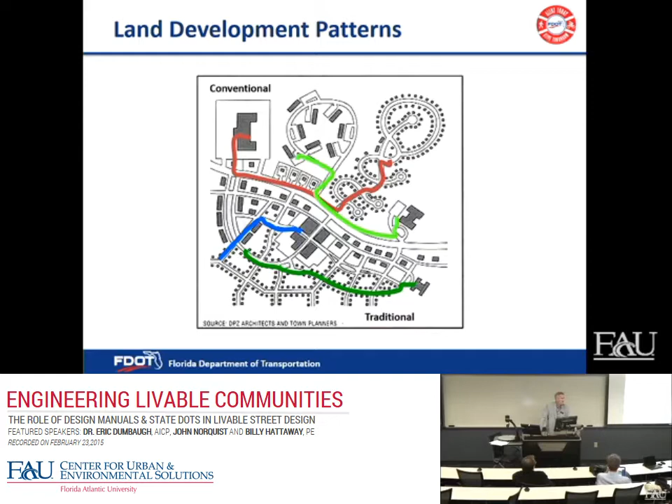People may still choose to drive, but they have lots of choices in terms of how they want to get around. And so, when we talk about complete streets, lots of folks say, well, if you'll just put in bike lanes and sidewalks and landscaping, then we'll have a complete street.

But the fact is, here's a street that has nice windy sidewalks that some landscape architect designed. It has trees. It has transit, by the way. It doesn't happen to have bike lanes, but people are probably riding on the sidewalks. But when you have buildings set back this far, who is going to walk in this environment?

When I was growing up in Winter Park, Florida, the retail typically had no more than one bay of parking in front of the stores, and that was it. And over the years, that retail has moved further and further away to where sometimes it's 1,000 feet back from the roadway. And so people are just not going to walk in this environment. And as John mentioned earlier, the parking requirements have driven this to a great degree. So we've got to work on land development regulations as well.

And something that I only found out less than 2 years ago now, I didn't realize that the school boards were independent of the counties, and so they have their own problems and challenges. I live in downtown Orlando, and in Orange County, when I put this slide together, I found out that the Orange County elementary schools were averaging about 1,000 students. Some of them are now over 1,300. And yet, the most effective elementary school from an education standpoint, based on some research I identified, was 300 to 400 students, which is what I went to when I grew up in Winter Park.

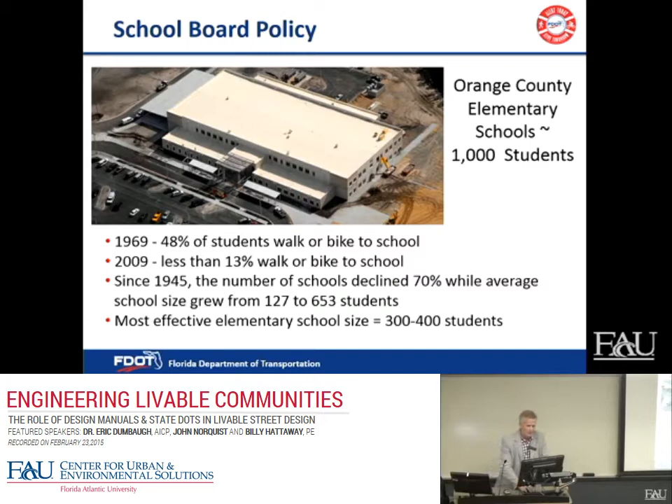And so what happens is, despite the fact that the state school board only has recommendations for minimum school siting sizes, most of the counties still follow those recommendations. So what happens? They buy cheap land out in the middle of nowhere with no network and no transportation, and literally every child is driven or bused to school. So they're contributing significantly to the problem. So we are also working on that challenge as well.

I'm the chair for Bike Walk Central Florida, which is a nonprofit focused on getting Orlando off the top 10, and we're working with our Orange County School Board to try to get them to change their land development regulations as it relates to school siting. You heard Eric mention this earlier.

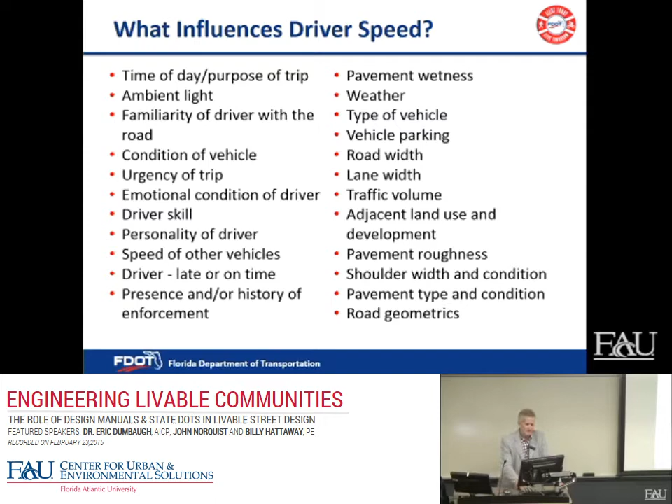And then most of our arterial system is posted at 45, and as we know, people don't drive 45 if they can get away with it. So speed is a huge problem and challenge with this initiative. And when you look at all the things that influence driver speed, there's a whole bunch of stuff that have an impact on that. But we do have control over some of those, and those are the form of the built environment and what makes up that form, including the amount of activity you have. All of those things can help to reduce the speeds, and not independently of one another. It usually takes more than one.

And what I would say is that, from an engineering standpoint, we talk about driver expectation, and consequently, when you go from state to state, you see the same stop sign, you see the same traffic signals.

So in some cases, we do a pretty good job of meeting driver expectation, and people generally know what to do as they go from state to state because we're consistent. Where I would say we failed miserably is in sending a clear message to the driver how fast they should drive. You can't post a street like this at 35 miles an hour and ever expect people to drive 35 miles an hour. It's not going to happen.

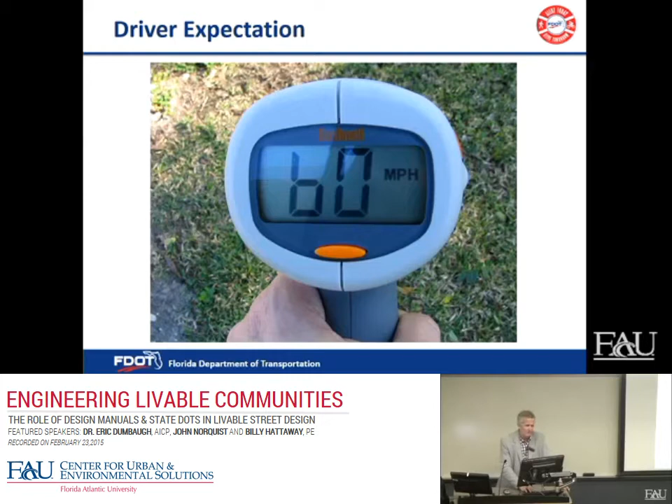And in law enforcement, I always drive 10 miles over the limit. There you go. You better keep it below 10.

And these are roads, I can tell you in my district, I've got a few corridors that I'm talking to local governments about road diets. Again, they typically want them for economic redevelopment. Typically where we've removed on-street parking, just like the slide you saw of John, the retail is damaged because they didn't have surface parking lots. So they're wanting to put on-street parking back in place and get the speeds down.

I'm actually working with District 5 on a corridor that they want a road diet, and in that case, surprisingly, the city engineers opposed, but we're going to win this one, I'm convinced, before it's all said and done. It's a 4-lane road. I'll show you a little bit later.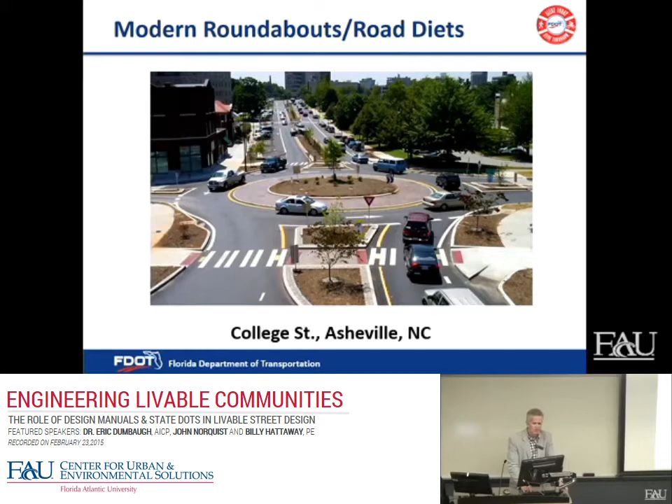So there's the after condition after that corridor was rebuilt. Big difference. I'll show you that one more time. There's the before. There's the after. So this is something that you're going to see a lot more of, both road diets and roundabouts.

The other thing that we haven't done a very good job at is we have large signal spacings on our arterial system, and typically we don't have good places for pedestrians to cross in between. If you have a mile or a half a mile between signalized intersections, how realistic is it to expect people to walk? There's literally nobody that's going to walk that far. I don't care who they are, whether they're an engineer, a district secretary working for the DOT or the average pedestrian. They are not going to walk a half a mile to cross at a signal.

And so we've got to be more aggressive with the use of mid-block crossings. We've been putting them in for a while, typically on undivided sections where we have a 5-lane section, and we'll put these islands in. They're not marked. They're not ADA accessible. And I basically told the secretaries that does not fly. We're going to put in real crosswalks. We're going to mark them and provide traffic control features, and I'll show you a couple of examples.

The city of St. Pete has probably close to 100 rectangular rapid flashing beacons. We'll be using these on 2 and up to 4-lane roadways. They're proven to be very, very effective in getting people to yield to the pedestrians, and we'll be using high-emphasis crosswalks, very much like what you see here. On 6-lane roads, we'll use either the pedestrian hybrid beacon, also called the HAWK, or a normal pedestrian signal.

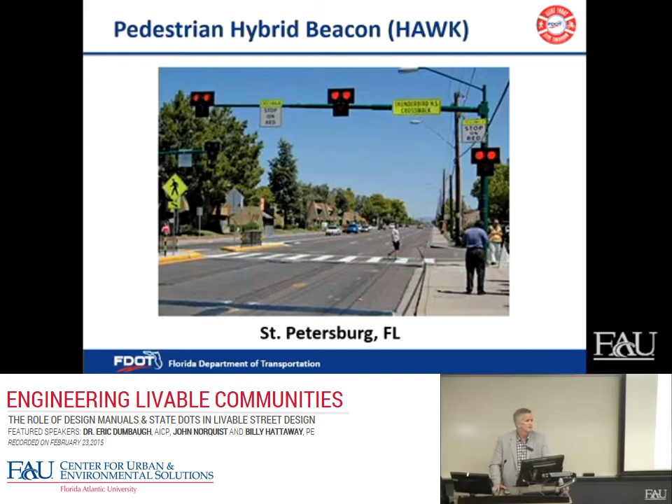Stop and go. You can stop, and if nobody's there, you can go. So this is one of the treatments we'll be using extensively. As we moved in this direction of using a context-based approach to street design, some of our engineers are really interested in moving forward and doing things differently.

And so I pointed out to them, by law, we're required to produce what's called the Florida Green Book, which is used by local governments on local streets unless they have their own street design standards. And up until a few years ago, there was nothing in there that really dealt with the urban environment. Everything was suburban or highways. And so I've been a member of this Green Book Committee, which the DOT runs, for a number of years.

And when I was in the private sector, I had 3 of the members approach me and say, we really need something that shows us how to do streets for the urban environment, because we're getting more and more requests from developers and we don't know how to do it properly. So they asked me to come in and make a presentation at the Green Book Committee, and I made the presentation on what could be done, and then I promptly flew off to do Eric's class at Texas A&M or someplace like that. And while I was gone, they selected me to be the chapter author. So don't ever leave after you make a presentation like that.

And so I ended up being the chapter author for the Florida Green Book, which basically, by law now, allows us to do streets on local streets with 9, 10, and 11-foot lanes. It's backed by Florida law, adopted into statute. Because we can't have pretty pictures and graphics traditionally in the Green Book, although I did sneak some in there, we have a handbook that accompanies it that's basically best practices and educational. So the link for both of those documents is in there. And of course, I shared this with our engineering community and said, if you want to get a head start, this is where you need to go.

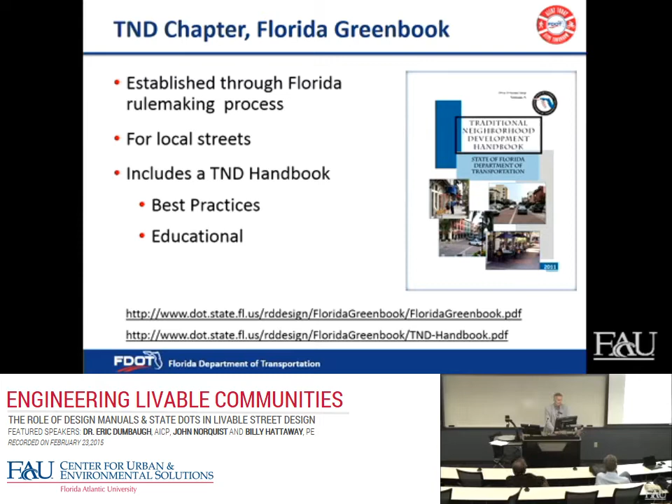So this is the framework that we'll use for adopting our complete streets policy in the plans preparation manual. And while we use the Green Book, as they've both shared, there was a guide put out in 2004 by AASHTO, the same committee. I was on the subcommittee on design when we approved the research to do this guide for achieving flexibility in highway design. Because if you look at the research behind the criteria in AASHTO, what this guide tells you basically is that the basis for the criteria is not safety research.

Most of your engineers, if you told them that back in 2004, would have said, well, you're crazy. This is all about safety. It had nothing to do with safety. It had to do with maintaining the operating capacity and the operating speed of the roadway. So there's very little research related to safety in AASHTO, and that hasn't changed dramatically since 2004. And so what the 2004 guide said is this is the range of flexibility you have, and you have lots of flexibility based on using the AASHTO policy.

It's just that states like Florida took the policy and said, okay, we're going to use the highest values for everything because more is better, right? That's the typical engineering mindset. And engineers want to do the right thing, but basically by using the plans prep manual, we told them there's only one way to do stuff. And so anybody that did something other than that is seen as kind of a renegade or a rogue. I guess I am one of them. And so I tell all the engineers that 2004 guide should be required reading for anybody in the transportation industry.

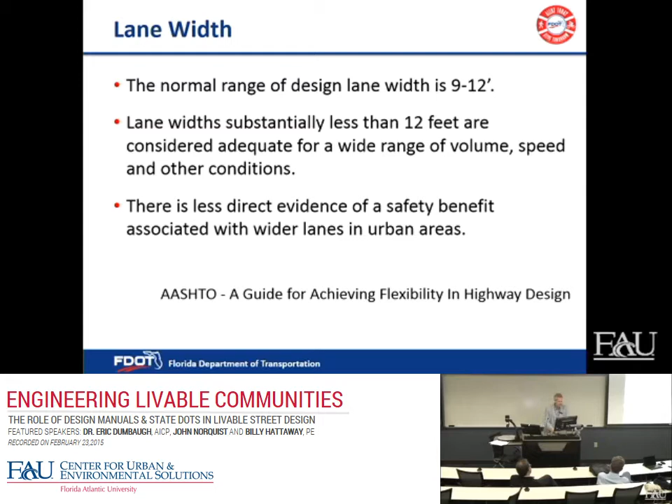So one of our challenges, we talked about speed management, and one of our challenges with speed management has to do with the number of lanes. I've had over the years people come to me and say, if you would just take these 12-foot lanes and reduce them down to 10 feet, then people will drive much slower. But unfortunately, I wish that would solve the problem, but it doesn't. The number of lanes comes into play heavily, as does the land development patterns.

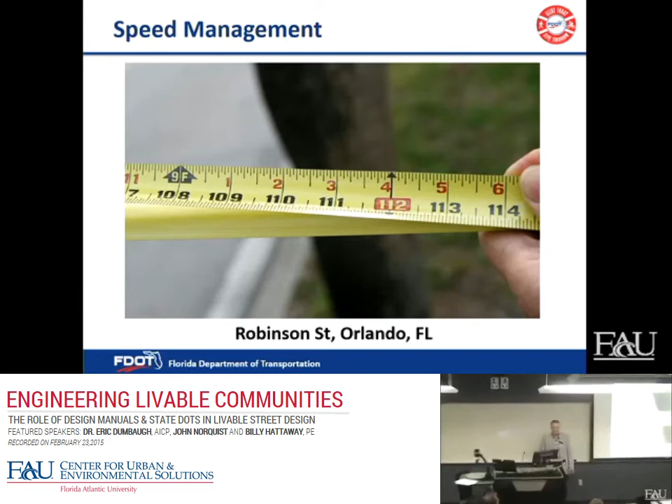We actually have fairly high crashes on this corridor, considering the volumes, which, by the way, are well below the threshold for a 2-lane road's capacity. They're at about 14,000, and the capacity of a 2-lane road is closer to 21,000, actually higher. So this street happens to be.

Would you have suggested the same solution if the volume was 25,000? It would have to be studied then, but sure. From my perspective, a city should be able to make decisions about what level of congestion they can accept. If you ever go to Park Avenue in Winter Park, Florida, it's congested all day long, and nobody complains about the congestion there because it's a great place to be. So if a city, in my district at least, as I'm working with the local governments, is willing to politically take a stand on accepting a higher level of congestion, I'm on board with that. That, to me, is the key.

Yes, ma'am. On that street that you're remodeling, where are the bikes supposed to go? We're encouraging a walkable area. I know that part, of course, but near the lake, sure, bikes aren't supposed to be on the sidewalk, and yet here's an opportunity possibly to park some space for them.

Is that... there's not room. I'm going to contrast that street with this street, which is on the other side of Lake Eola. This has the same curb-to-curb dimensions. If you park that street and you have refuge islands, you don't have room for bike lanes. There's a place, again, getting back to context—we don't have to have bike lanes on every single street.

I ride on this street all the time. Now, I'm a more experienced rider, but remember, this is a gridded network of streets here, so there's tons of different ways for bicyclists to get around. It's not like every single street needs one—it's a gradient where, if the speeds are low enough, you don't have to have bike lanes. Correct. Exactly, I'm going to talk about that, actually.

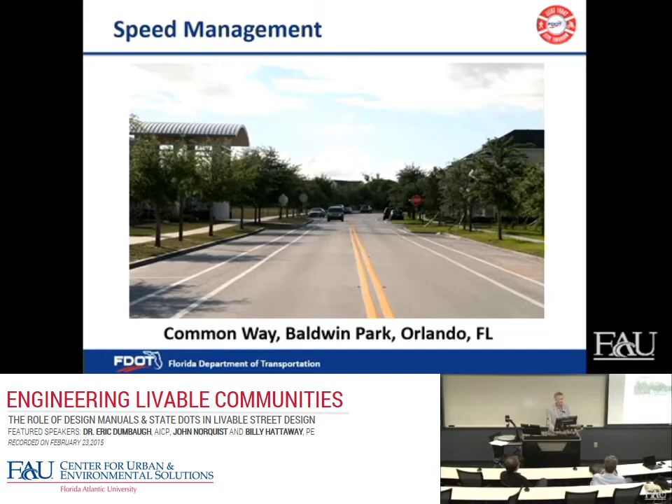This is the main street in Baldwin Park. There are no bike lanes on this street, and people drive slower here than on the previous street. These are 12-foot lanes - not narrow ones. I would have made them narrower, but they're 12 feet. You'll see people pulling their kids in bike trailers down this street all the time because it's a slow street and people behave.

So what we're looking for is for local governments - when I present this, I tell them we're willing to do the right thing, we've got leadership on board to do the right thing. When you're looking at redevelopment, you need to take these larger parcels, similar to what John showed earlier.

I worked on a mall in Salt Lake City - it was the first enclosed mall there to be redeveloped, and we completely gridded out that mall. I worked with DPZ on that project, developing gridded networks of streets and bringing the buildings up to the back of the sidewalk.

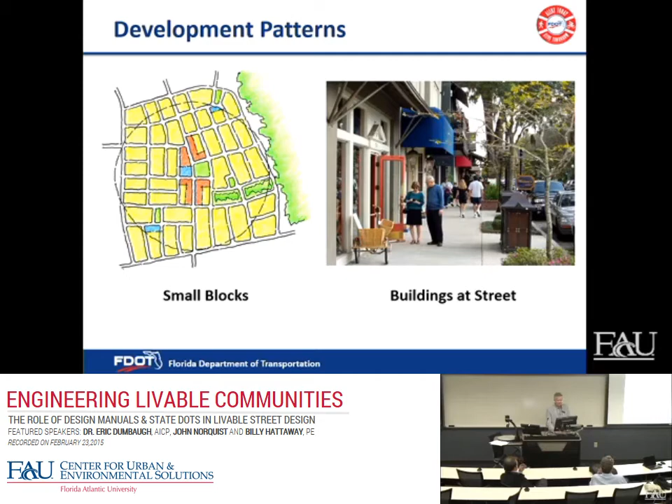Here's Baldwin Park, as a contrast to most of our land development patterns. You're lucky to get two streets connected in a lot of our developments because of the belief that gated subdivisions are safer - and even then, both entrances are often on the same road. Baldwin Park is an infill project with 32 street connections to the outside network. All the schools are within it, and they have a Publix, CVS, yet people still choose to drive in this development.

There are no 4-lane roads and no signals within the development, because there's so much network that you can get around even with that many people living there. I think they're planned to be at about 14,000 residents when built out, and it's probably the most popular development in Central Florida - the instant the economy turned, they were building again.

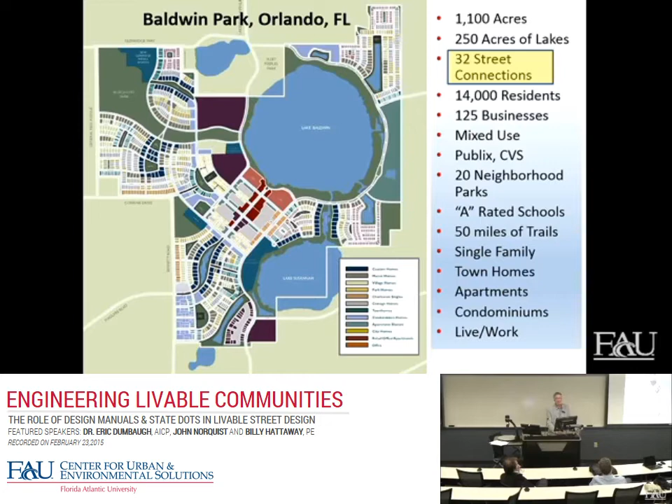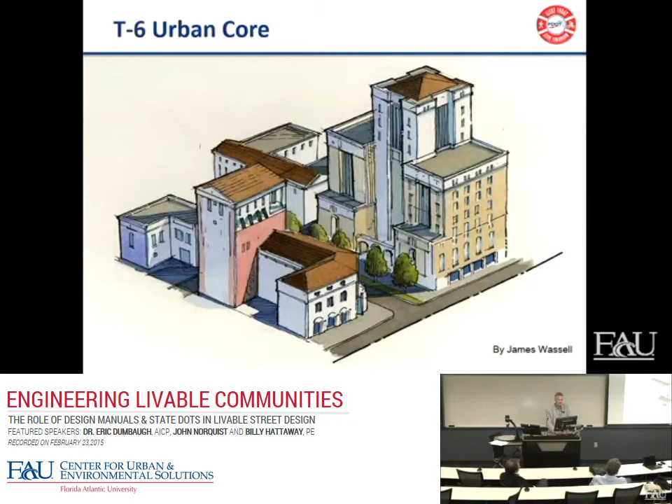So what we're going to be using is the transect zones - Eric has probably introduced you to these. We're going to tell our engineers how to understand context, and use the transect zones to do that. I'll go through these slides quickly so you understand what we mean by context. As an example, context-based bike facilities - we're going to look at context, speed, and volume, just like John mentioned.

For low-speed, low-volume roads, shared travel lanes are fine, and we'll put markings on the street accordingly. We've already adopted a 7-foot standard bike lane - our previous bike lane for a curb and gutter section was 4 feet.

Plus the 1.5-foot gutter section, we're now going to a 7-foot standard buffered bike lane, still have the gutter pan, as on new construction, and we can achieve these even on resurfacing projects.

And then for our higher speed, higher volume arterial roads, nobody is using the bike lanes, which is unfortunate, understandably, because you're still in the travel lane next to high-speed traffic. So we're feeling like chances are we will likely end up with multi-use paths on those corridors instead, outside the curbs. So those are the things we're looking at.

I'll just show you a couple of slides where we can take travel lanes and pull a foot out of each travel lane. There's a 6-foot bike lane on a 4-lane resurfacing project, and a 7-foot bike lane on a 6-lane resurfacing project, just by repainting the roadway after we replace the top course, as we call it, of asphalt.

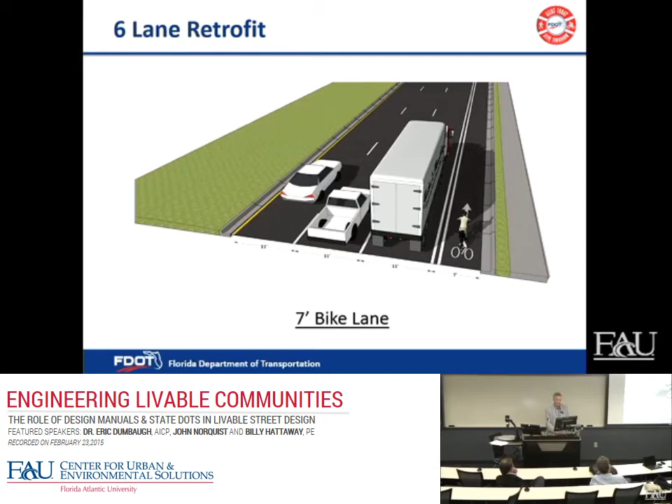So what we're doing is we're asking local governments to help us make this happen. If they really want complete streets, they have to have a highly connected street network.

I show them examples. This is a small redevelopment project in Winter Park with residential upstairs, retail on the ground floor. When I first started doing this private sector work back in 2002, it was very, very difficult to get the chains to build in these kinds of environments.

This is the first Publix grocery store, which my wife spends our grocery money at, and it's on the ground floor of a condo building. It's not a standalone Publix, has no surface parking lot. There's a small parking garage underneath that it shares with all the other retail on the street, and people walk in.

That manager was at a suburban Publix before, where we also happen to shop, and he said he sees his customers a lot more now because they don't wait and come in with their car and load up. They stop on their way home or on their way out or at lunchtime.

Not only is Publix willing to do this model, but there was an article in USA Today about a month and a half ago that says Walmart is looking at, this is a 30,000 square foot store, Walmart is looking at 15,000 square foot neighborhood stores to put in places like this. So that shift has changed.

Obviously, we've got to work on the school boards and get them back to smaller scale elementary schools. This is my daughter's school. No school buses go to this elementary school; they walk or the parents drive them in.

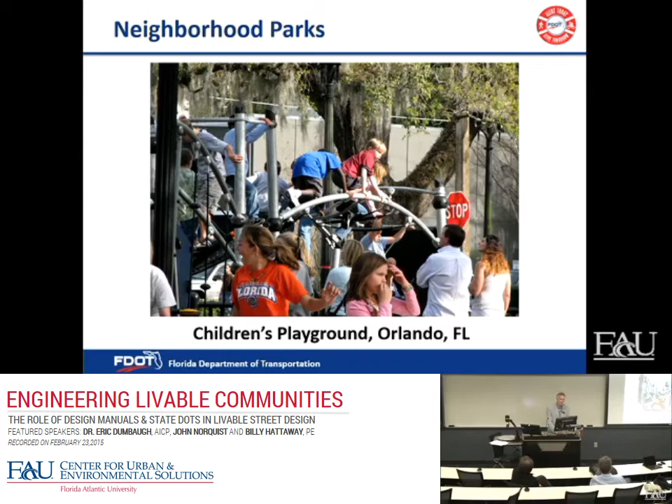Neighborhood parks: downtown Orlando is filled with neighborhood parks. We obviously have a place for regional parks, but neighborhood parks are important, again, so that kids can run down the street and play in their neighborhood parks.

I'm going to show you a couple of examples of how you make these corridors complete. This is a small scale project. I was project manager on this. This is south of Tallahassee, and this little community did not want the DOT to make this a 4-lane divided highway.

So we came up with a plan that would avoid that by using the network outside of the state road system. And we said, if you want to make this the kind of village that you say you want it to be based on the charrette, we showed them how this could be transformed. But they have to change their land development regulations.

Right now, all their retail is set back with a parking lot in front and a retention area in front of that. So they've got to change those land development regulations. This gets the street started, but without buildings at the back of sidewalk, it is not the same. So that's what their after condition can look like.

So how do we deal with these large corridors? John mentioned earlier he was describing a multi-way boulevard. This is a project I worked on with Dover Kohl. The locals did not want the mayor's plan, which was to put interchanges at every signal, so the business community and the citizens funded our charrette.

The businesses along these frontage roads on the outside were failing. These are two-way frontage roads on the outside, and then you have Johnny Dodds Boulevard, which is a higher speed corridor on the inside, although when that broke down, people were speeding by on those two-way frontage roads. So we know we have to have access for businesses.

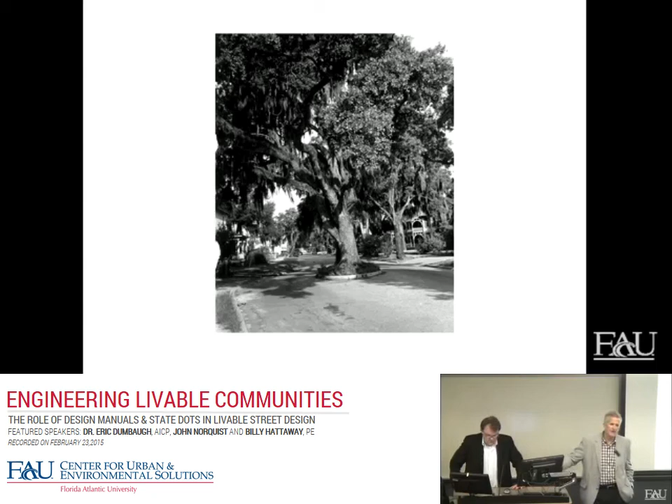And there was one person who was probably creating some pushback on these kinds of principles. As I've gone around and made presentations to every specialty group within the agency, including all the district design engineers, that particular guy came up to me afterwards and said, 'I finally get what it is you've been trying to tell me for some time now.' So I'm hopeful things are changing for the better. Back when Rick Chesser was the secretary in District 4, they were clearly on board, but they kind of had gone backwards, in my opinion.

You've also got some things down here that I'm beginning to appreciate more than before. It's easy to hurl invective at the DOT, but the county engineer has a lot of control over the simple fixes, and they are obstinate in a way that I don't think anybody from our DOT is. So I would agree - depending on the nature of the thing, you can get them from both ends, from DOT and from the local side. But what happens many times is they blame us when it's really their agenda, just like the city engineer in the city of Orlando. Nice guy, but he's opposed to pretty much everything we're trying to do. My hands are tied. Well, stop giving him money. We don't give him any money.

I was wondering, being that you're from the Orlando area, how do you feel about the new I-4 renovation they're doing to that area specifically? How do you feel about the impact? It should be finished around 2021, I believe. What kind of impact do you think that would have? Which impacts are you referring to? Because there's all kinds of impacts. Well, because it's really congested as far as I know. Do you think the new express lanes and widening will relieve some of the traffic flow? I commute every day on I-4.